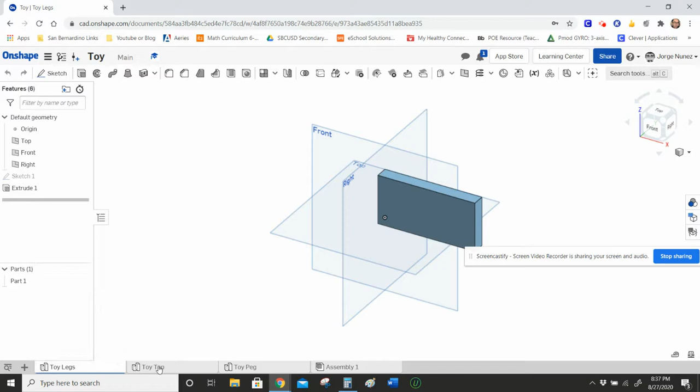I renamed the parts of the toy on the bottom left-hand corner. This is called the toy legs, which is just that rectangle. If you want to rename it yourself, you can right-click it, select rename, and change it to toy legs. This is what I call the toy top, which is the one with the hole in it. Again, you could always right click and rename that. And then this cylinder shape is what I call the toy peg. Again, you can right click and rename that if you want to.

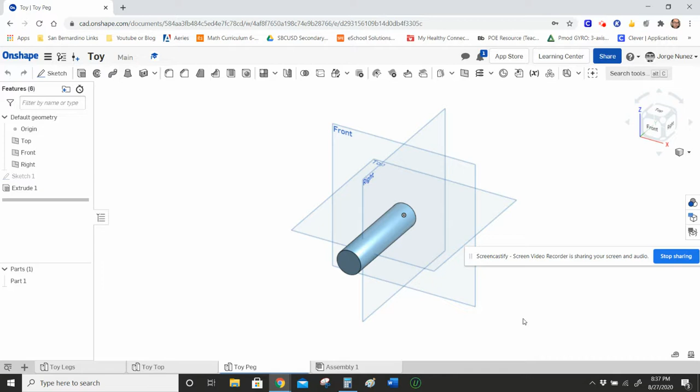Once you guys have your document, which I call toy, as you can see on the top left hand corner, every single time you guys create shapes or parts in OnShape, it'll give you an assembly file, which in this case we don't have anything there because we haven't really assembled anything. Now we're going to actually assemble it or put it together.

What you want to do is limit the degrees of freedom. We talked in class about there being 6 degrees of freedom, right? Up, down, left, right, front, back. So now we're trying to put it together and limit the degrees of freedom for this particular object so that it does not move in three-dimensional space.

That little dot right there is actually the origin for this particular space. And we could actually use the origin to constrain our part to it once we're done moving stuff around and constraining the parts that we need to.

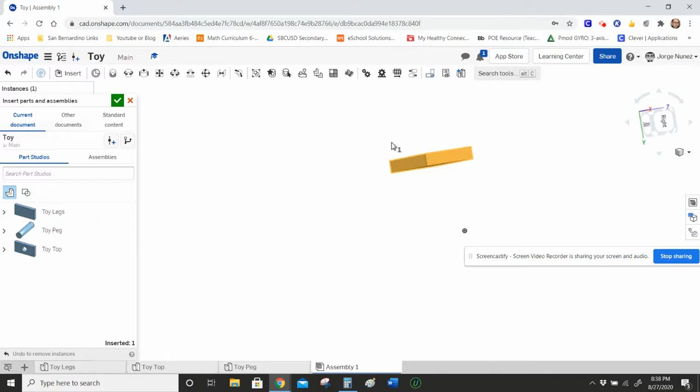So first thing we need to do is insert a part, whichever one you guys want. I'm going to go ahead and insert, let's go with the toy top, anywhere you guys want. Once you left click on that, it'll insert it. As you can see, this is my toy top here, right?

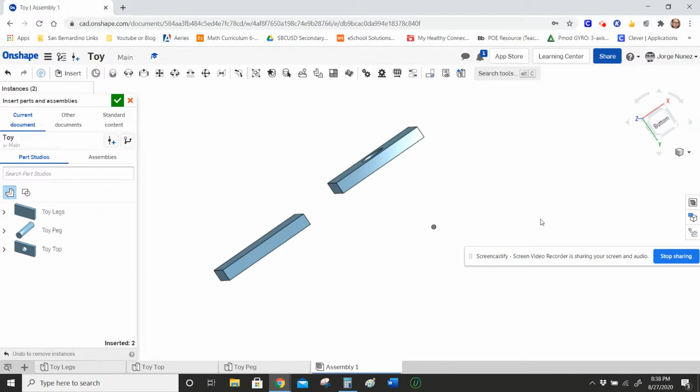Wherever you guys want. Now I'm also going to insert my toy legs, or actually one of them. And again, wherever you want to set that down, you can go ahead and click. And now you have two things that we have to put together that we need to constrain.

So I don't want the peg there, so let me just get rid of that. So you should have these two for now.

Now what you're going to be using primarily is the planar constraint, which is the one here that looks like a plus sign. It kind of looks like X and Y axis. The planar constraint will either align the two planes together, meaning put them on the same plane, either because they're a little offset, or it'll put the faces of the planes together depending on which planes you select. Let me give you guys a really quick example.

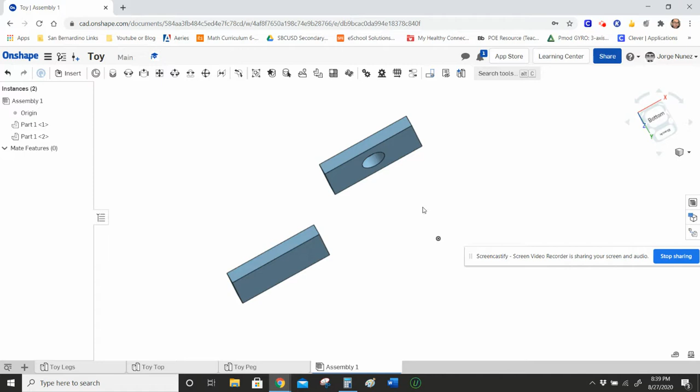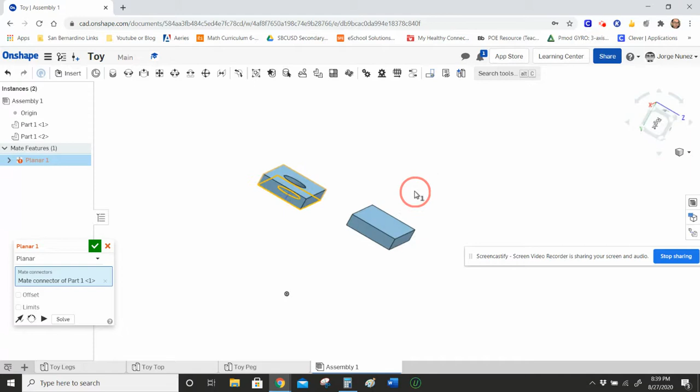Let's say I want to put the leg on this little table here. I'm going to select the planar mate, and I'm going to say that this bottom of this toy table, or toy top, so that'll select this plane, right? Notice that it colored in yellow. There is a normal little arrow pointing down, meaning that it's waiting to be connected to something, whatever plane you select. I'm going to go ahead and say that this is the side that should be connected to the bottom of that table. So once I select that, it'll rearrange itself into the orientation that it needs to go.

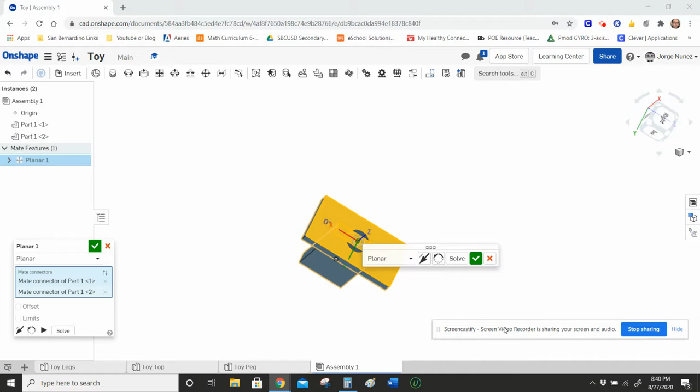Now notice that it is going to look a little bit funky in the beginning. That is normal. I'm going to go ahead and select the little check mark. On the left-hand side, you'll see a little exclamation mark. On the top left-hand corner of your keyboard, you have the escape key. That is your best friend. Push escape, and then that'll go away.

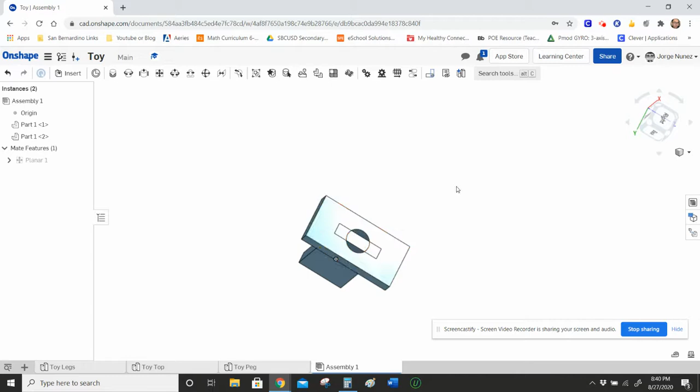So now, as you can see, I've put one constraint so far, so I've limited only 1 degree of freedom, meaning if I look at it from the right side, let me double click here. If I look at it from this side, I can only move this left, right, and up, down, right? But notice that I cannot move it in the other direction.

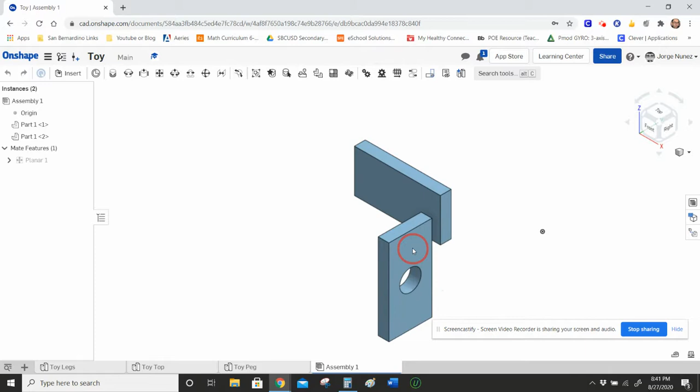So if I look in this isometric, I cannot move this in this direction because it's already constrained, so they would actually move together, because those two planes are connected together for this particular part so far. But I want to limit some more things on it. I also want to make sure it doesn't slide around, because this isn't a very safe toy to do so. I'm going to put another planar constraint.

Now that I have that leg kind of where I want it, but not really... actually, I think I messed up on that first plane. I'm going to delete that because I can see I actually selected this face. Actually, would it work? Yeah, it'll work. Okay, never mind.

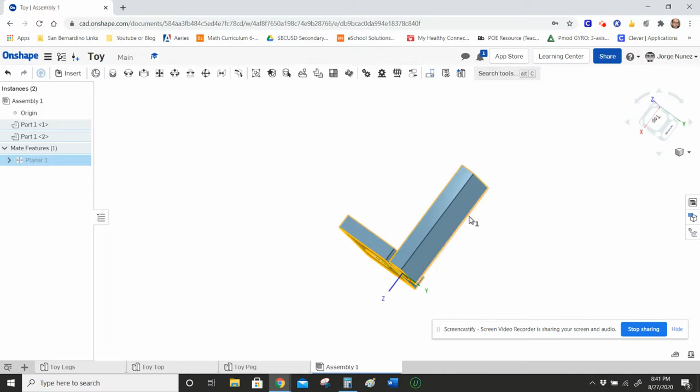What I'm going to do is bring this leg down. Actually, would it work? No, I don't think it would work. Let me go ahead and redo that really quick. I'm going to delete this and try again. I want this to be the bottom, right?

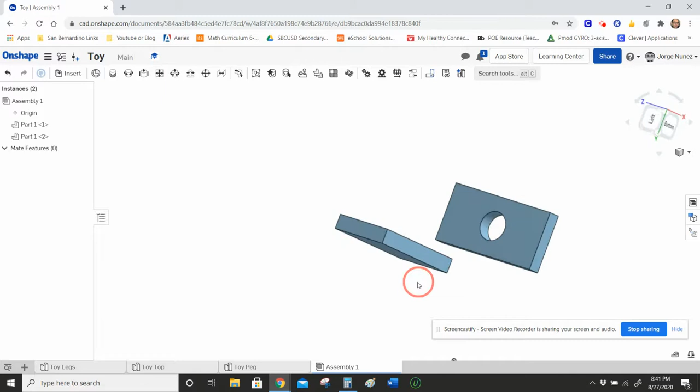So if I do that, let me try the planar mate again. This bottom of the table — again, be very careful when you click stuff, because sometimes it'll give you something you don't actually want, which is what happened to me. Let's see if it did it this time. There you go, it highlighted it. So that's the one I want — the bottom of the little tabletop.

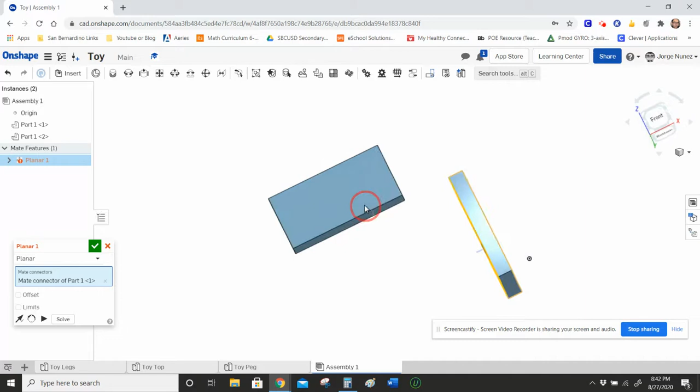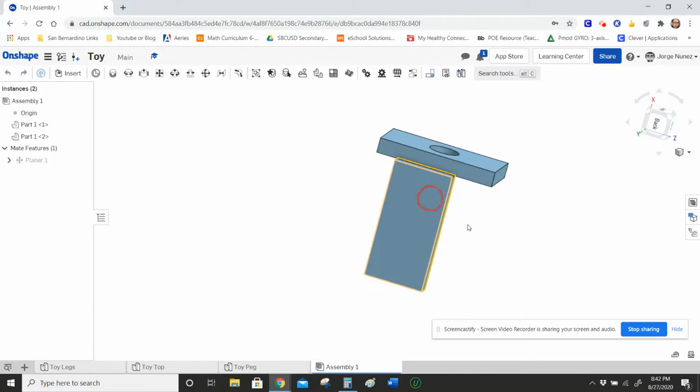And that'll be connected to this face right here. I'm going to select OK, escape, and it should be at the bottom of the little table. Now it's on the right face. Notice the degrees of freedom are limited now, so I can only slide it around — forward, backward — but I cannot move it away from that plane. If I turn it around, you'll see it better. I can slide it and move it in different directions, but I cannot move it away from that plane.

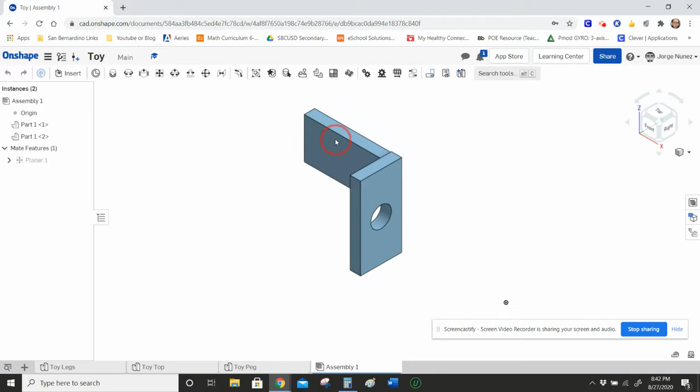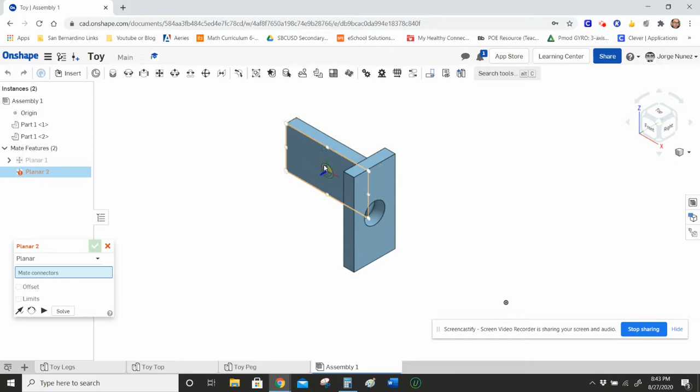Okay, now we're going to constrain it just a little more. What we want to constrain now is another planar constraint — we'll be using a lot of planar constraints for this assignment. Now that I have the bottom of the table, I'm going to have the little leg turn so that it is actually... well, you'll see what I mean in a bit. I want the bottom of, or this plane right here, which is the side of the leg, to be coplanar, meaning on the same plane as this side right here.

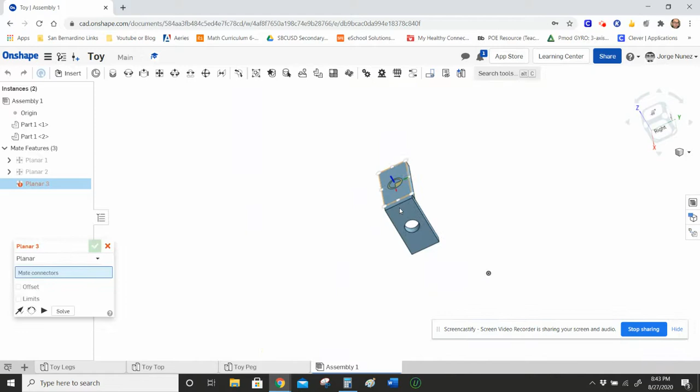Let me get on the other side because it's being annoying. If at any point you want to zoom in because it's annoying, you can always do that. I'm going to select this plane right here, and okay. Let me zoom out so you can see what I'm talking about. Let me zoom to fit. Okay, now escape so it doesn't give me any issues. And as you can see, I can move this.

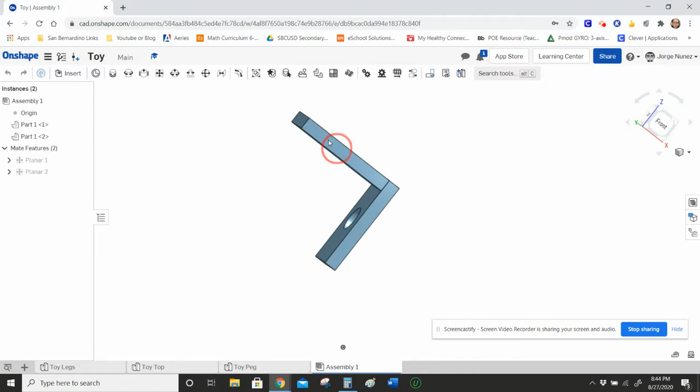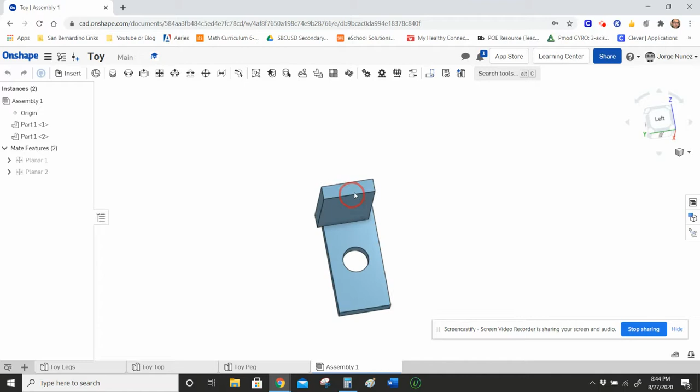Actually, I think it's pretty much set. Seems like I can move it in only one direction. Let's see — it's kind of hard to see from this angle, so I'm going to turn it so you guys can see. Okay, there we go. So I've limited the degrees of freedom, connecting two planes together: the top of the leg to the bottom of the table, and then the planes to be like the side here. So this is constrained to that, and now they cannot move. The only way I can move it is forward and backward in this case, but I don't want that to happen either, so I'm going to add another planar constraint.

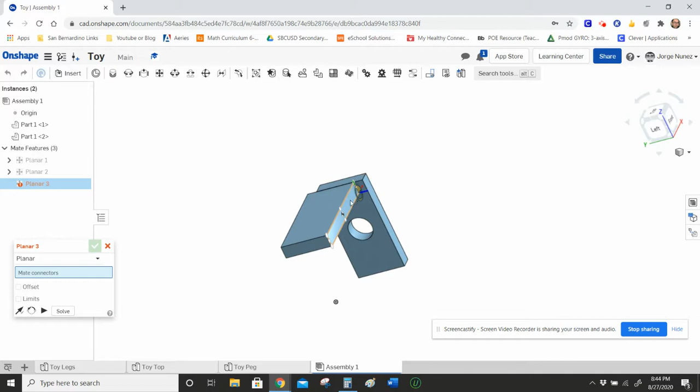This time I'm going to be zooming in. Okay, let's try it, got to be careful. I don't have a little mouse wheel, so it's kind of hard to zoom in with my fingers.

I'm going to say that this plane right here should be connected to this plane right here. And what I mean by connected is that it should be coplanar to this plane. When I select those two, it's going to look funky again, like I mentioned earlier. I'll select OK, and now everything just satisfies once you select OK and hit escape.

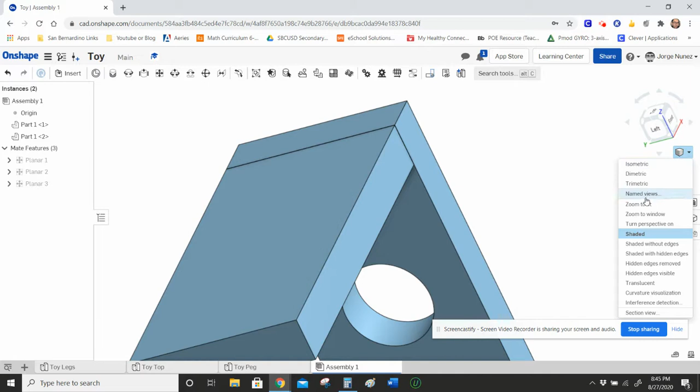Basically everything should be where it belongs now. When I select zoom to fit and turn this around, you'll see that this is actually now the leg of this little toy table or whatever. So now we just have to do that on the other side as well.

If you notice, if I try to move this around, I can't. I can move it if I move the whole thing around, but I can't move the leg by itself anymore because now it's connected. I made these two planes be coplanar to each other, I made these two faces be coplanar to each other, and I made the top of the leg to the bottom of the table stuck to each other. So now I can't move that around anymore.

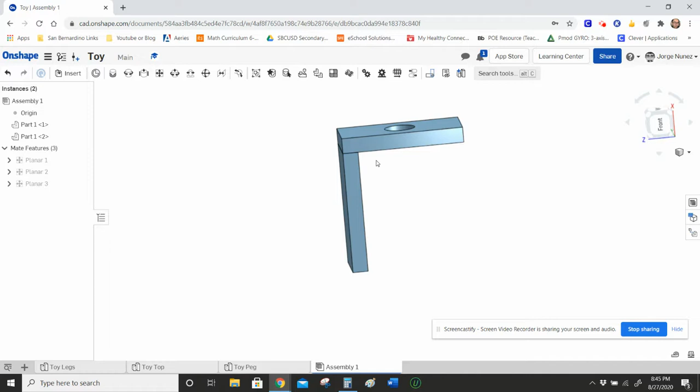So if I go ahead and select insert and put another toy leg down, I'm going to put it on this side now. Now I can actually work with this. Escape—oh, my bad, this escape key is good for some things and bad for others. Okay, I have to select the little green arrow that I actually want.

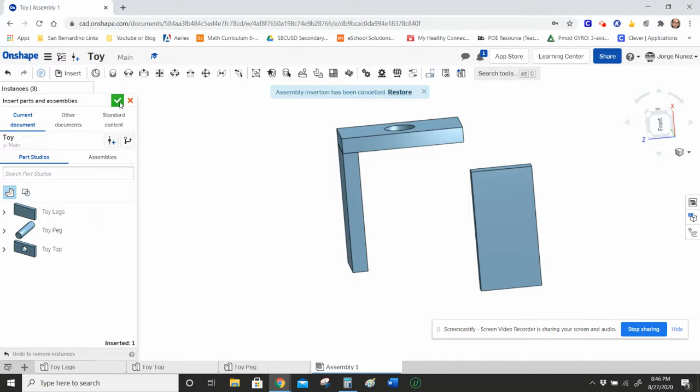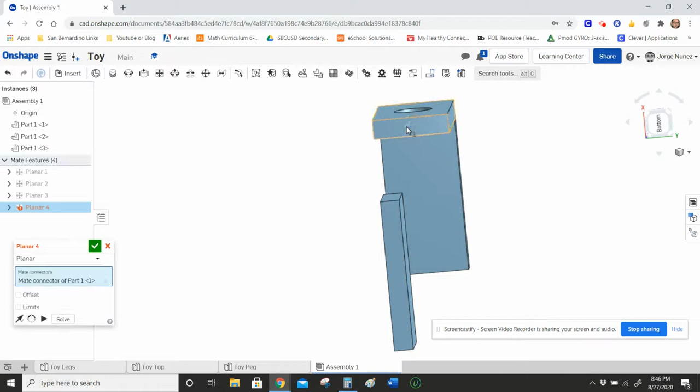All right, so let's do this again. Again, we're going to use a lot of planar mates. The first thing I want to do is say that this plane right here should actually be coplanar, meaning on the same plane as this right here—this side of the leg.

If I do that, it'll turn itself and look funky, like I said. It's okay, just click the little arrow, and it'll reset itself once you confirm you're okay with that decision. Then hit escape.

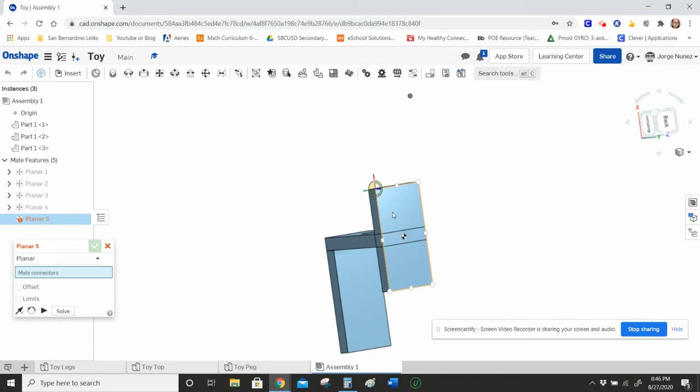Once you do that, notice that I can actually move this around—up, down, left, right if I wanted to—but I cannot move it away from that plane, forwards or backwards anymore. So now we just have to constrain it two more times, kind of like what we did last time.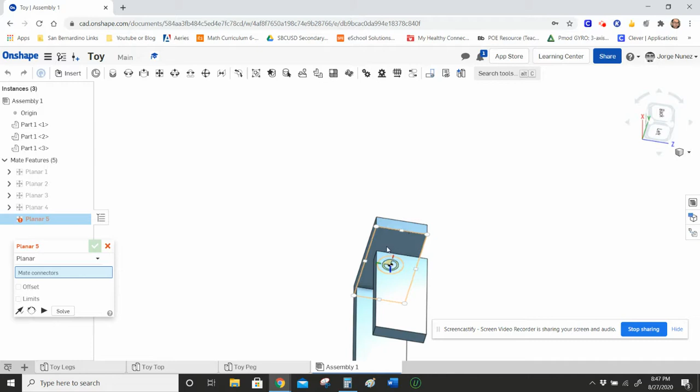So if I click on the planar mates, now I want to connect the bottom of that table. Let me zoom in so I know I'm doing the right plane, so it doesn't mess up on me like last time. That should be the bottom of the table. Hopefully it did it correctly—there we go, it highlighted it.

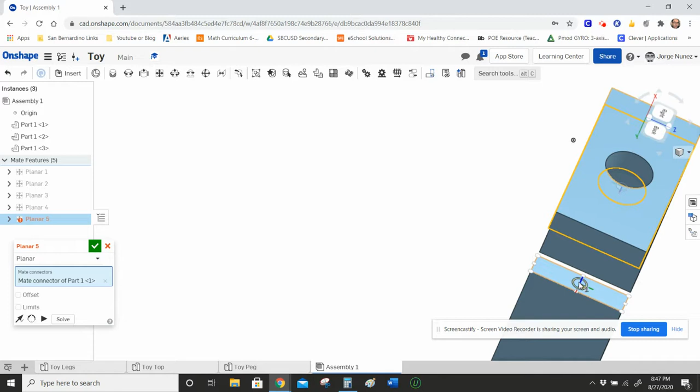So the bottom of that little toy table, I'm going to connect it to the top of that leg, then select that plane. Once you do that, select the green arrow, again escape, and now we have two planar constraints. At any point, if you lose view, you can always select zoom to fit, and it'll go back so you can see what's going on.

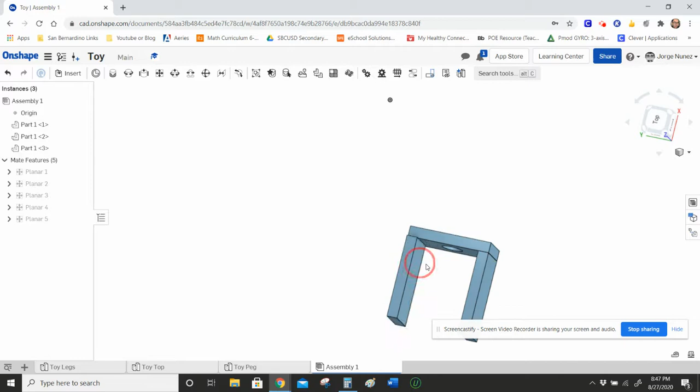Notice that I can move the little leg. Wait, is this the right one? I think this was right. There we go, this was the one I was working with, because this is the one that's actually moving around. So notice that I can move the little leg in only two degrees of freedom now.

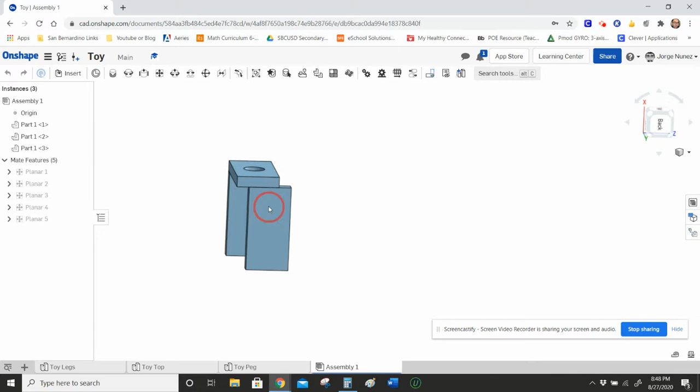I can move it to the right or to the left, according to my orientation, but now I don't want that to move at all. So now I want to get it stuck, meaning I want to constrain the planes. This side of the tabletop—let me zoom in a little bit—that side of the tabletop should be coplanar to this plane right here, which is that side of the table leg.

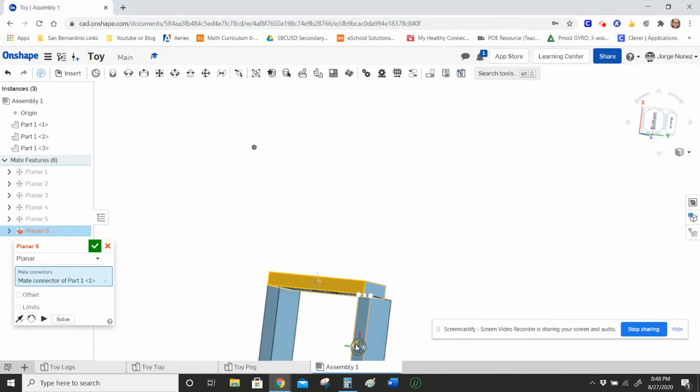And again, it's going to look funky. Once you select that you're okay with it, it'll rearrange itself properly. So zoom to fit, that way you can actually see it, and now escape.

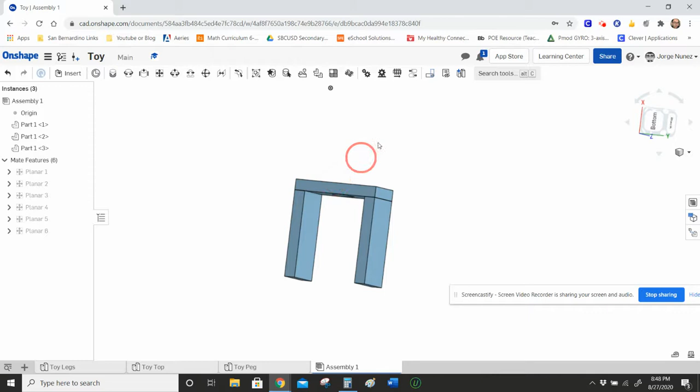And what you notice is that this thing actually is able to be moved, but it can be moved together as one single unit. So in 3-dimensional space, you don't want this to be moving in every direction, so you actually want to constrain it to something, and that's why that little point is there to begin with. That little point is a point in space you could use to constrain things to that point.

You could use what is called on the left-hand side a Fasten Mate. So now let's say I don't want this to move around, because I'm going to put the peg in there somewhere, and I don't want this moving around. If you select the Fasten Mate, which is the very first constraint you should see, I'm going to select that point and fasten it, get it connected or stuck.

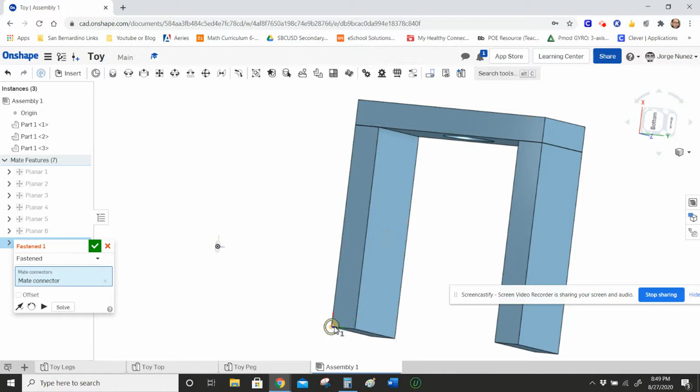Imagine if it's bolted down. I want to get it bolted down to this corner right here. Just pick one, let's go with whichever one. Let's go with this. Again, it's going to look funky, kind of like all the other ones.

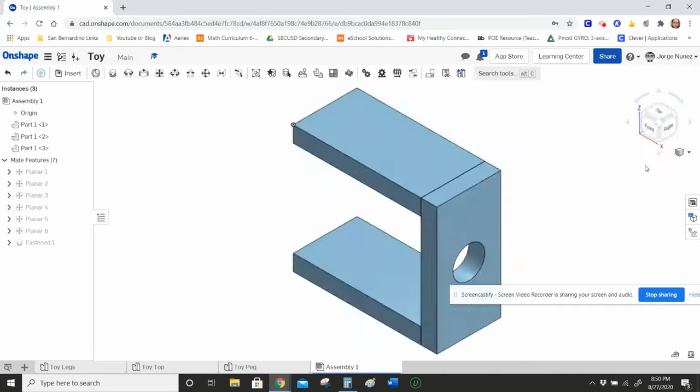If you select the little green arrow saying you're okay with it, it'll rearrange itself and actually be stuck to that point. Let me show you what it looks like in zoom to fit. Notice that the point is there on that little corner where I put it. Let me put it on isometric view so you can see. And you could always turn this around if it bothers you, or rearrange it however which way you want.

But the important thing is that the degrees of freedom are not there anymore. This thing cannot be moved. This is fully assembled. All we need now is the peg. So let's put the peg down so we could insert it.

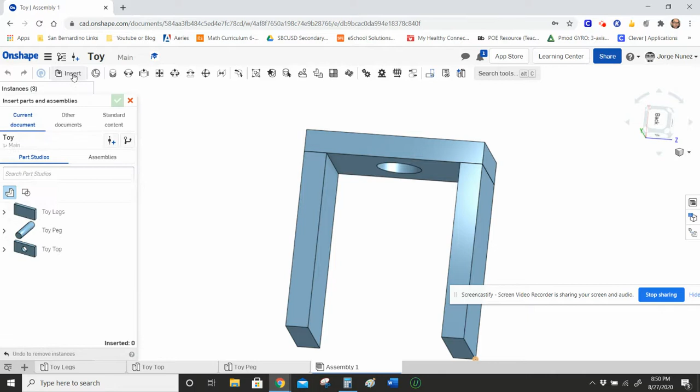I'm going to go ahead and select Insert, Toy Peg, and drop that down anywhere. Once you're happy with how many of those you want, you just select the little green arrow. All we got to do is drop that peg in that hole.

For that, we will need one of the constraints, I think this is the cylindrical mate. Actually, let's go with slider mate. Slider mate is the one that actually works, because that's exactly what we're going to be doing for this peg. So I'm going to select slider mate. Basically, this peg is supposed to slide in and out of that little hole there.

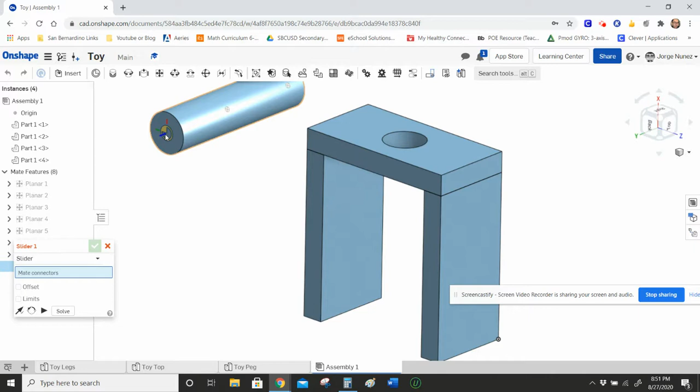So I'm going to select the middle of the peg, the center. There's a line going through the center of that cylinder, so select that center. And I'm going to also select the center of this hole. Then once you do that, if you select the little green arrow, now we limit the degrees of freedom, because we made those 2 center lines collinear, meaning it cannot go anywhere besides on that line. So those 2 center lines are exactly the same for the hole and for the cylinder.

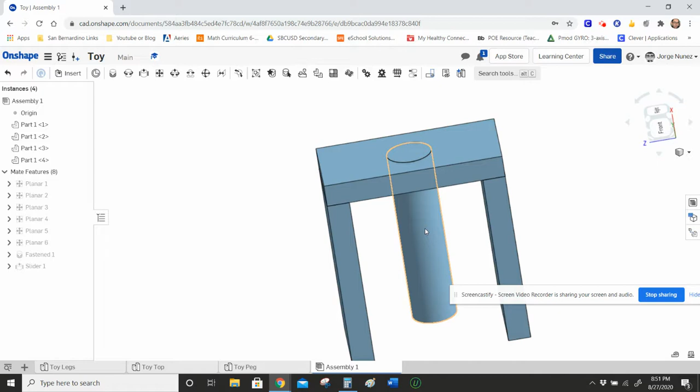The only thing we can do with this little peg is still slide it, because that's why it's called the slider mate. It makes the 2 lines collinear, but we could still slide it up and down.

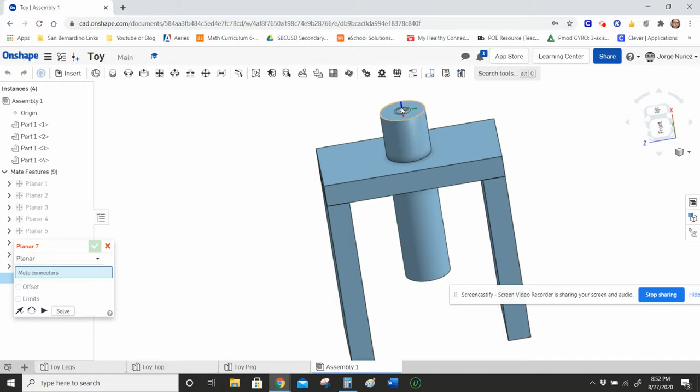Now, the last piece of the puzzle: if you don't want it to slide up and down, if you want that to be stuck or go planar to the top of the table, I'm going to do one last planar mate, meaning I'm going to say that this top of the cylinder will be coplanar to that surface, which is the top of the table. Once I select that and select the little green arrow, now I have my fully assembled part, which is this little toy that I made up.

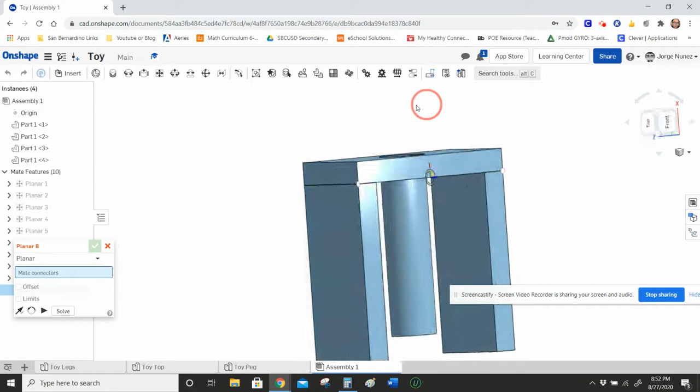Again, this is just for you to practice. What you guys are actually going to end up doing, besides turning in this particular assembly, is you're going to be assembling your cubes in the future. So I hope this was helpful. Make sure that nothing moves before you turn it in. Have a good one.